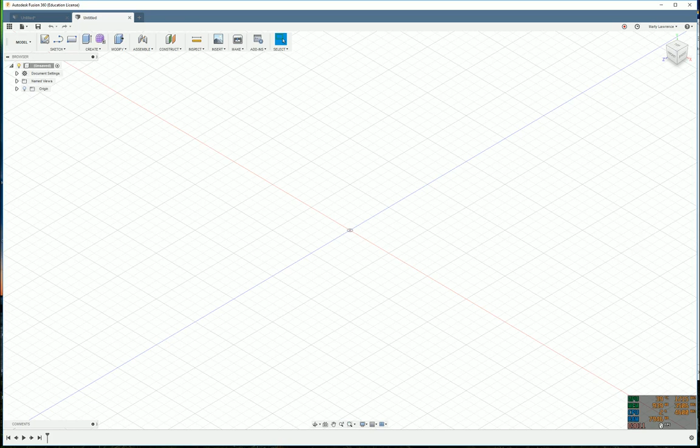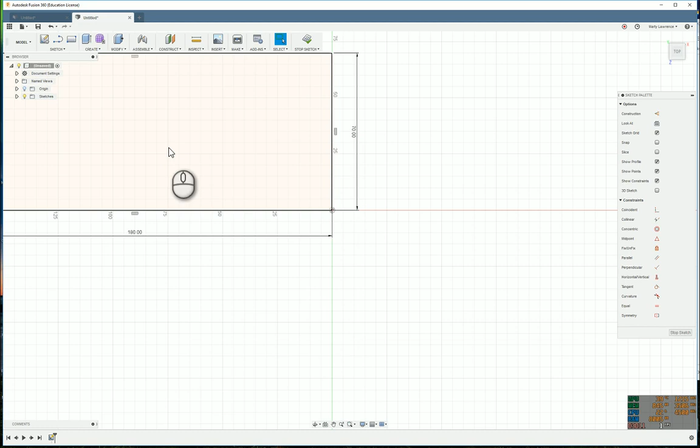All right, guys, I'm going to draw a joint here, and you're going to apply what I do to the joints that you draw. My joints will differ in size from yours, since I'm not doing the same joint you will, but you'll apply the technique to your own project. What I want you to learn is how to do joints, meaning joining parts together, and then use that to create an exploded view of the joint and render it.

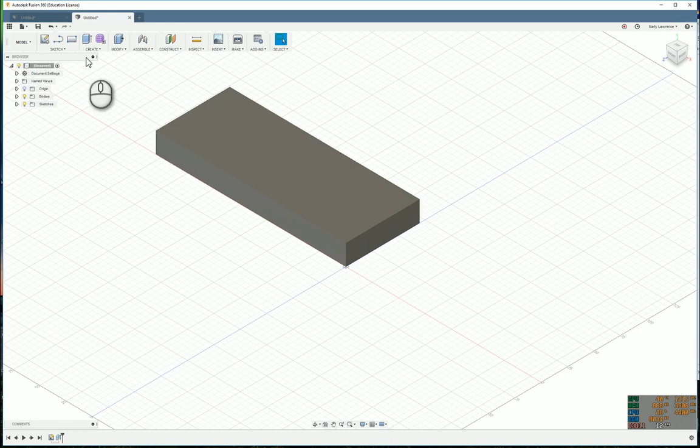So I'll quickly go ahead and draw a dovetail joint here. I'm going to draw two pieces of timber and do the joint. I've already worked out all the sizes, so I don't have to think about this much, I'll just go ahead and do it, trying to be as quick as I can. If you need to, you can fast forward through this step, or watch it and work out what sizes you might like to use for your own project.

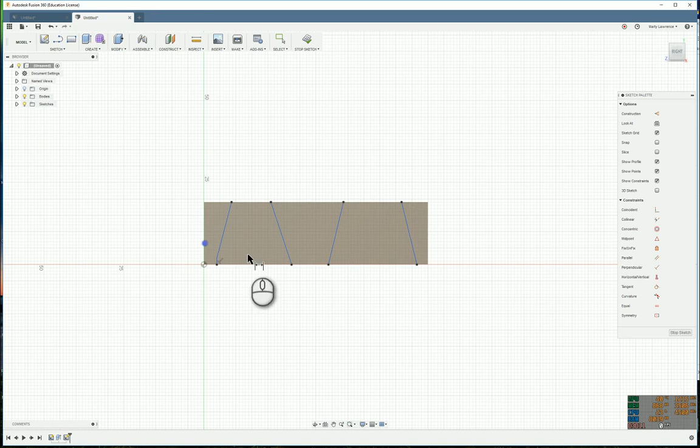Sketch dimension. What have I done? Let me backtrack, I need to reopen that sketch. There we go, I shouldn't have stopped it. Sketch dimension. That line looks wrong, it's not a straight line. Let me do that again, I must have double clicked there or something.

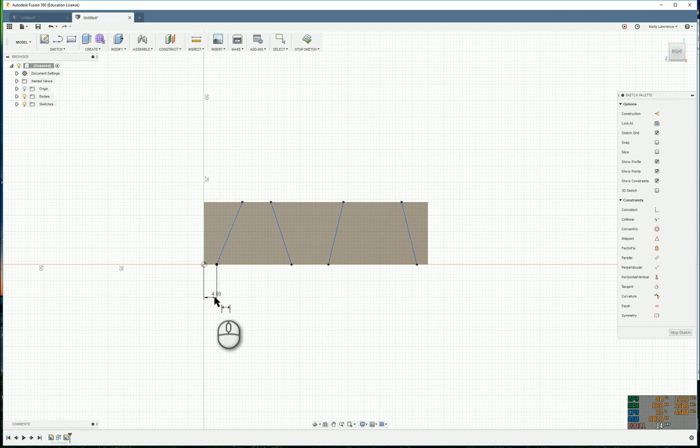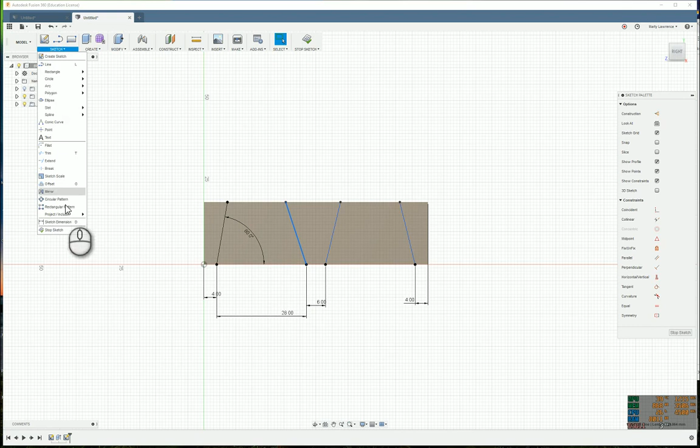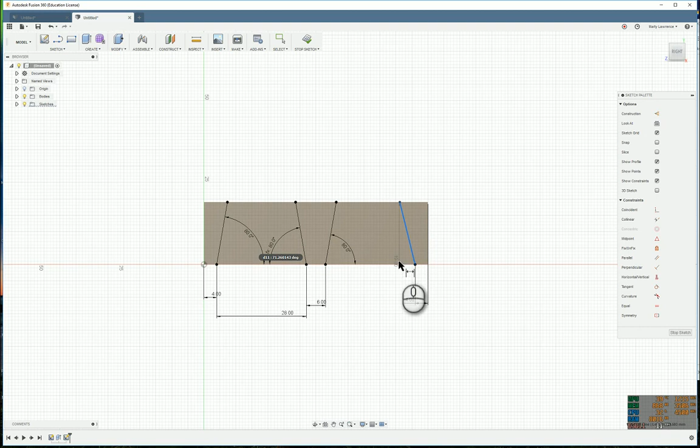Most of the time the angle for a dovetail joint is around 80 degrees. I'll show you a little trick here. This dimension is D10, see that, it's written there as D10. So with this sketch dimension button, instead of typing an angle in there, I can type D10 and it'll make it exactly the same as that first D10 angle. Which means if I screw up the angle or realize it's wrong, I can edit one and they'll all change.

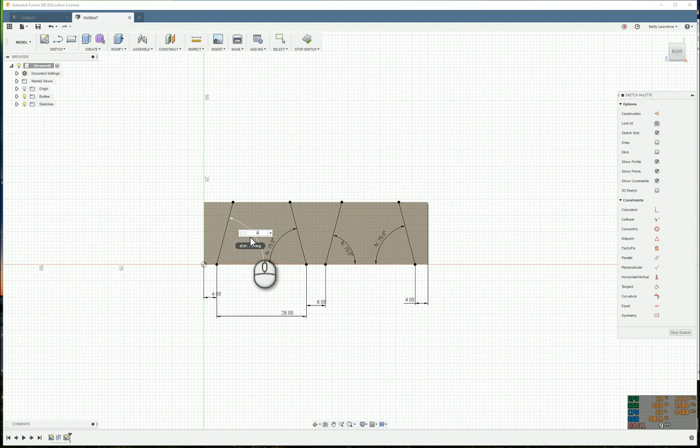Let me very quickly demonstrate that. So I double click and realize that should have been 75. Oh, didn't I check that? Look at that, I didn't even do what I said. Let's put this back to 80 and all those should change, as you can see there. Stop sketch. Go back to the home view.

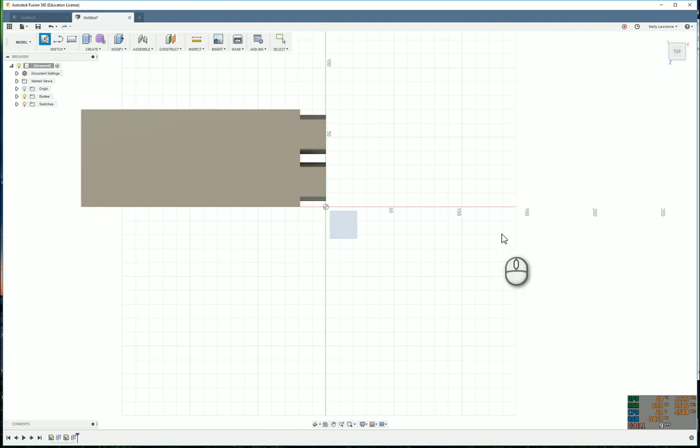I'm going to extrude now, and select those three faces. I'll type in -19. That's that there. Right, now I'm going to draw the other part. That's one part, create a sketch. It's also going to be on this bottom plane, I'll draw it down here. It's going to be a rectangle, 70 tab 180.

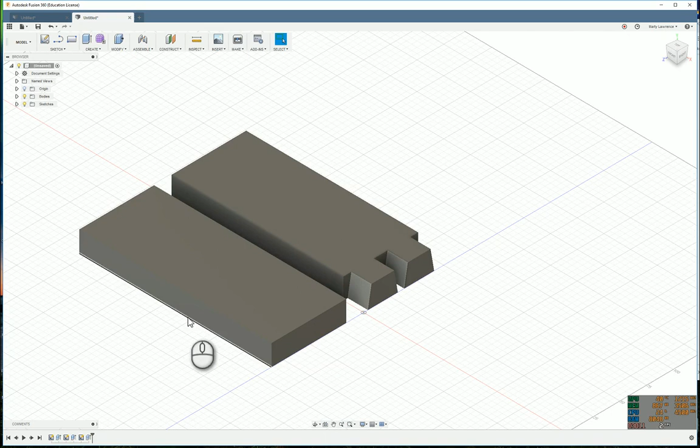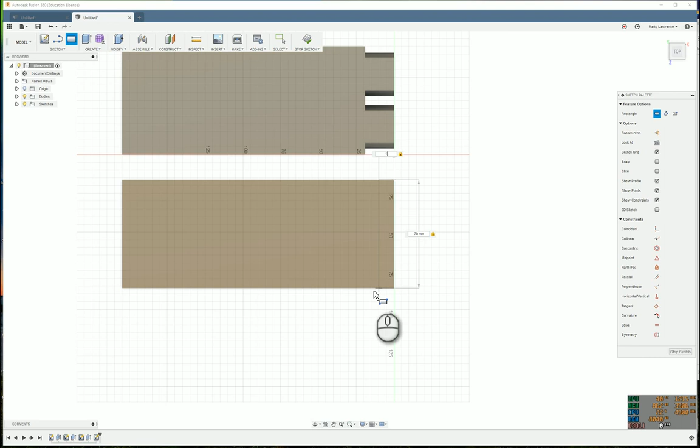Right, stop sketch. Extrude, 19. Create a sketch on here, draw a rectangle. Try that, 19. Need to reopen that sketch and finish drawing it.

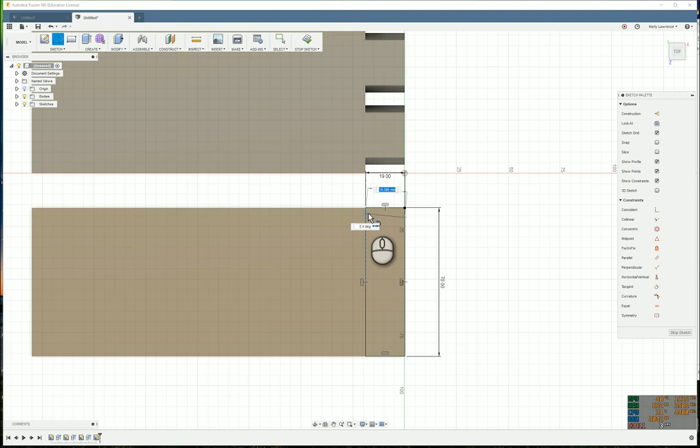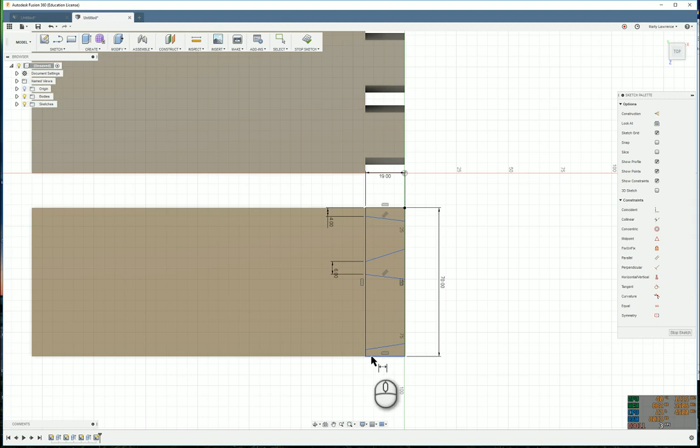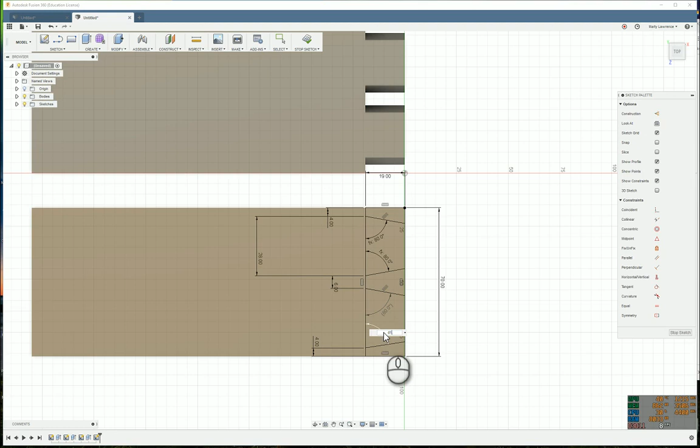For these dimensions, it was 4mm from the end, 6mm between them, 4mm here. For one of these, we only need to do one, it's going to be 28, and the angle, if you remember, was 80, but I can again simply type D10, D10, D10, D10. Stop sketch. Have I done this correctly? I hope so. Extrude that shape and that shape, I'm going to go -19.

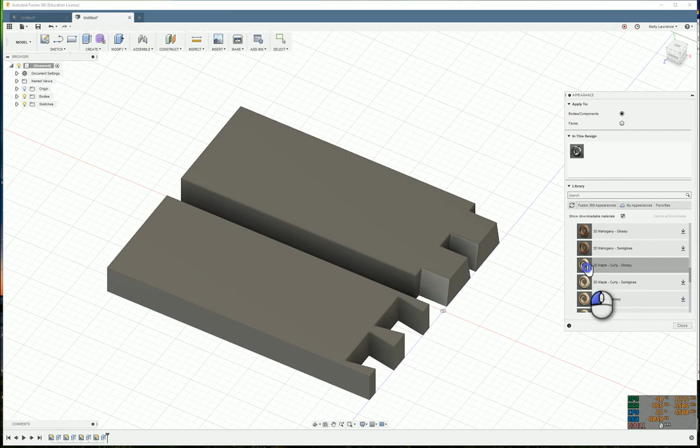That looks correct. Alright, just to make it a little easier to see, we're going to add an appearance to this. I'm going to make them both different from each other so there's a contrasting material, an appearance. 3D maple curly glossy looks good, we'll do that one. Yep, I always like walnut, so I'm going to download it. It's downloaded, and drag it onto there.

And close. Alright, we're ready to join these using what's called joints. Now, joints aren't going to work until we make these parts components. At the moment they're bodies, they're both listed here, and you can see if I highlight one in the browser here, it'll highlight each separate one, but we need to make them components. The simple way to do that is right-click on the bodies and create components from bodies. And there we go, component 1, component 2. You could rename these if you really wanted, but I'm not going to name it something more meaningful.

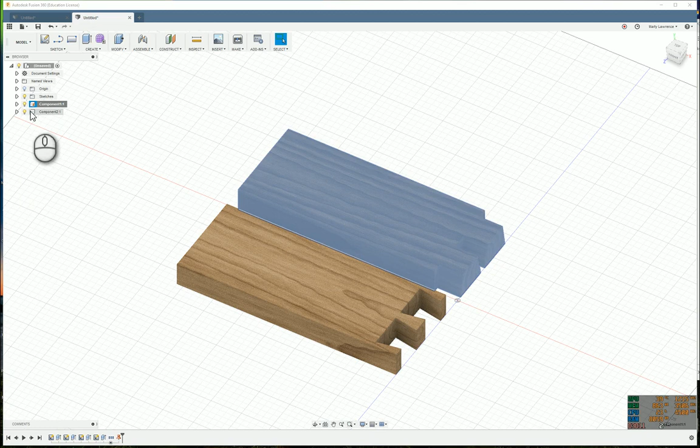Alright, now we're going to assemble. Actually, the first thing I want to do is choose one of these components, and this one will do, and I'm going to right-click and ground it. That means it's going to be stuck to the ground, you can tell by the little pin there, it's not going to move anywhere. Alright, now we're going to assemble, so I'm going to click the joint, or I could have hit J on the keyboard.

Okay, let me continue. We're going to create a joint to place these parts together. You actually have to think about this a little bit and think about how this is going to join together.

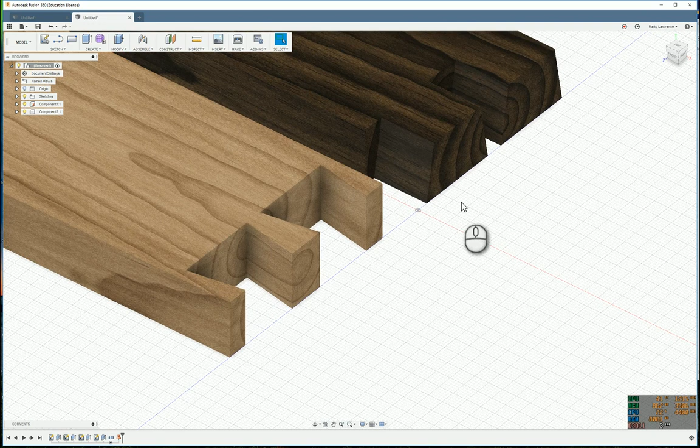So basically, this flat face that I'm pointing to here, when this joint is put together, will be sitting flush against this face here, which means this edge here is actually going to be aligned with this edge. So we need to think about that when we do these joints. You have to think about this stuff, or else you get yourself confused.

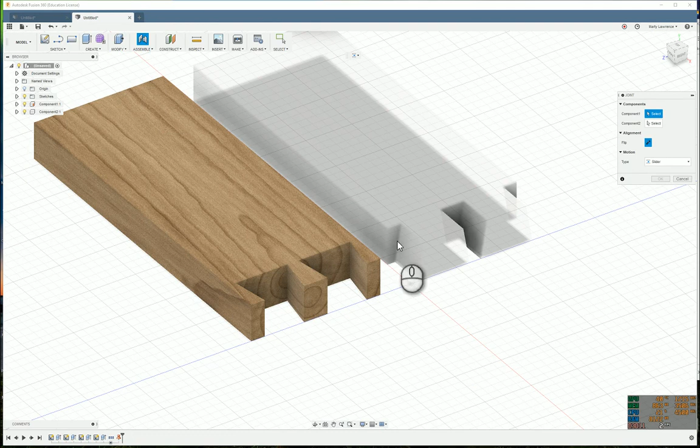Click the joint button. It's asking you to select a component, so I'll select this component, and I'm going to zoom in. I'm going to choose this bottom edge.

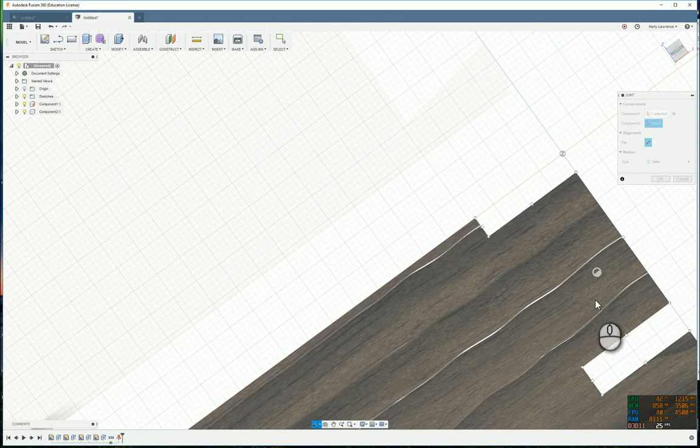Notice that when I'm hovering the mouse near this bottom edge, that little circle can either flip so it's on the flat there, or it will flip so it's on the edge of that joint. I'm just going to have it on the flat on that edge and click, and it's going to align with this edge like I said. We want it sitting flat, not on the edge, so click, and if I change the view, it's going to come together.

But the problem here is, if I click animate, it's joined together as a slider, but we know that's not true. It should be a rigid joint. If you make a rigid joint, the pieces will eventually be glued together as a rigid joint.

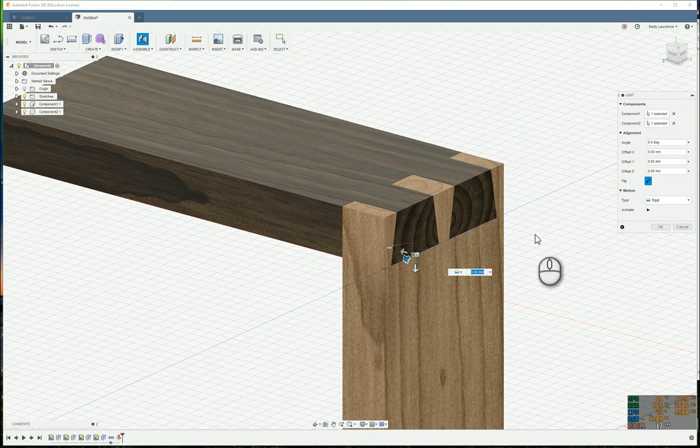Normally I'd just click OK and leave it at that, but for our project, what I'm asking you to do is create an exploded view. That means the joint's pulled apart. So in fact, we are actually going to do a slider, because this joint would slide together.

So it's guessing it wants me to slide along the z-axis. That's not true. So let's have a look at the y-axis. That's the correct one. If I chose the x-axis, it would be going the wrong way. So it is the y-axis, and it actually slides past the joint. I'll show you how to fix that in a moment. So we click OK.

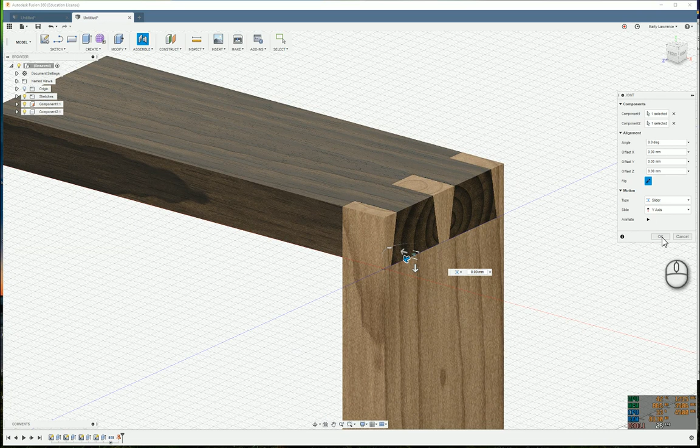If I simply click on this component now and drag it, I can drag it in and out of that joint. Let's see if I can get that back in place where it should be.

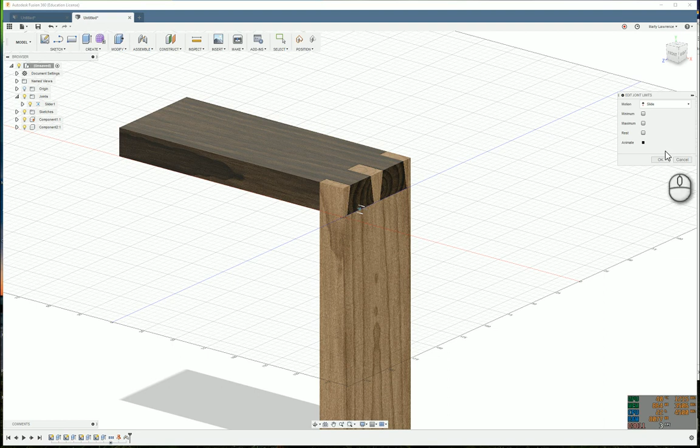Now what we want to do is make sure it doesn't slide too far, so we're going to set limits. If you click on these joints here and hover over the slider joint, you get this little red button, Edit Joint Limits. We're going to click on that. Now this can be a bit weird how this works, but we want to have a minimum and a maximum placement for this joint, and each of these icons show something.

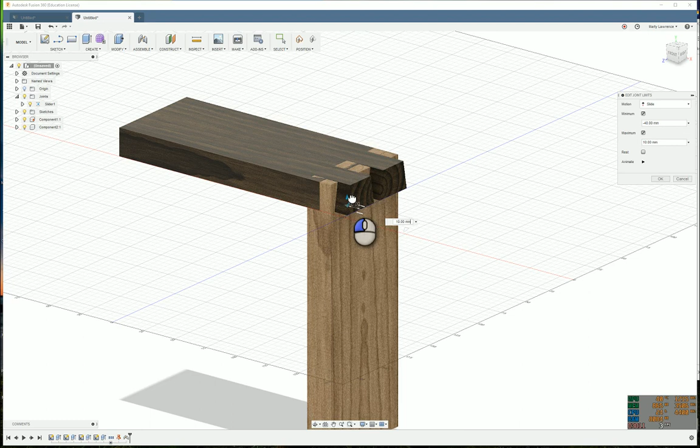So if I drag that out, and if I'm unsure, I can click this Animate. Yeah, that does the right thing. So if that was in the wrong place, I could drag this slider to a different place until they're sitting in the right place.

So this slider's set, and this slider's set. I could have typed the sizes in there, but fiddle around with that and you should get it right. Click the animation button, it'll show you how to do that. Then simply click OK. So again, I can drag that out, and it'll only go so far now.

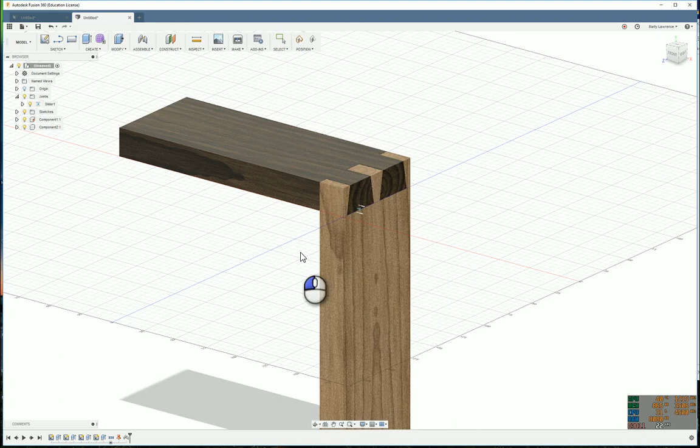Alright, change it to a view that you like. We're going to simply do a render. So I think that looks good. That displays what the joint looks like, shows you the joint.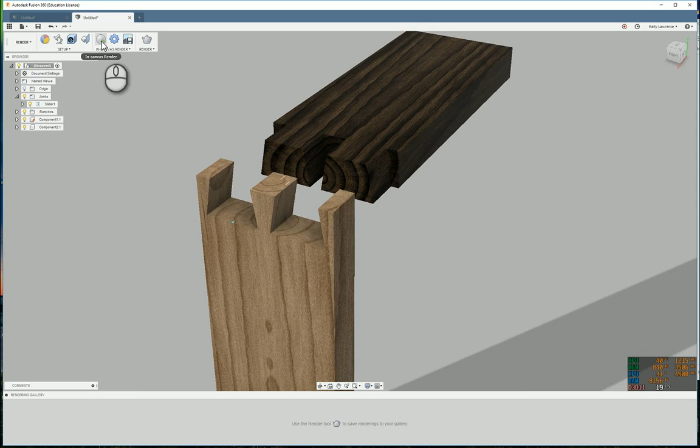So let's go over to the render page, click render, and what you do here in the render page is get the view how you want, facing the way you want, and then simply hit the render button. It's going to go through and take some time, and when this slider gets all the way over to here somewhere, it'll be finished. I'm going to pause this and come back when it's finished.

Alright, my render's finished. You can tell by the blue bar, it's gone all the way to this little marker here. If I slid that marker along, it'd render for even longer. But anyway, there's my rendered view.

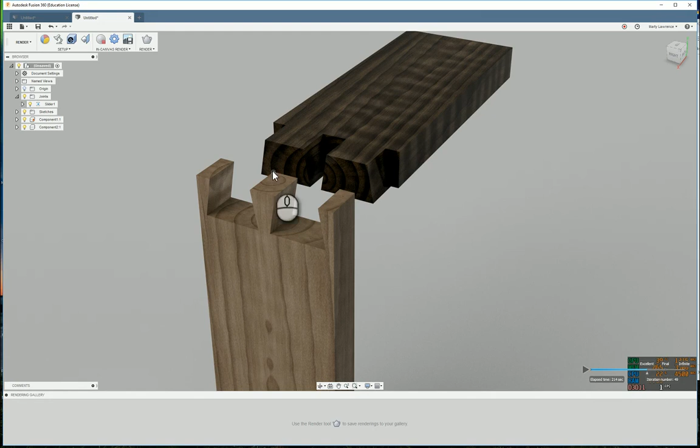Now please note, if I change the view, if I move this in any way, I'd have to re-render again, so I just leave it as is. I'm going to simply capture the image by clicking that button. Usually just leave this all the same, you don't have to change much there.

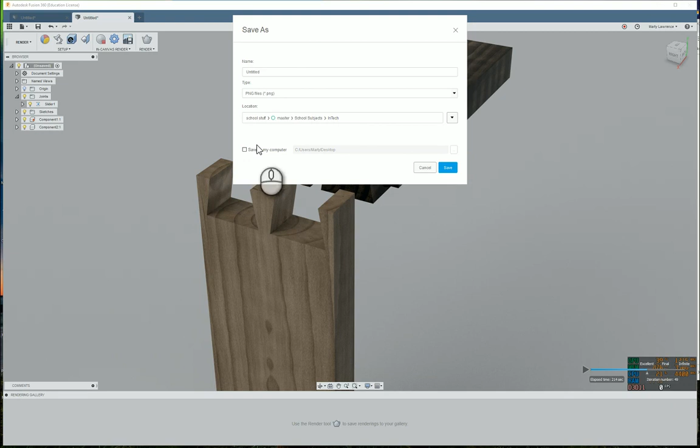Click OK. Now, normally this tick box won't be in, so what you would need to do is put the tick box in, choose a place where you want to save it, and obviously click save. If I don't do this, it uploads it to the cloud. So just for the process of what I'm asking you to do, save it to your computer and click save. And then of course you can add that to your document. Thank you.